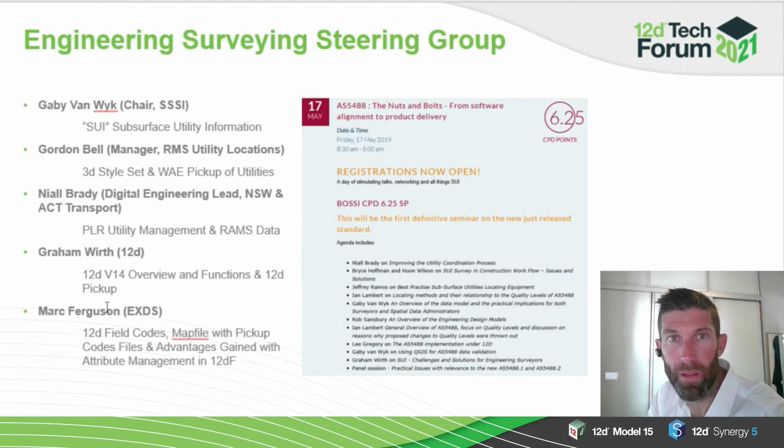Making them consistent with what the Australian Standard sets out, but also making sure that our feature naming conventions are maintained within the RMS guidelines. So we pulled together a lot of the utilities teams within the RMS space - Niall Brady, Gordon Bell, Gaby Van Wyk was the chair with his help through the Surveying and Spatial Sciences Institute. I want to thank them for facilitating our sessions, it was really great. We're looking to kick things off again once COVID blows over, to newer, bigger and better things. Graham Wirth and Marc Ferguson from 12d and EXDS were also involved to ensure we align both entities as to how we're managing all our services.

So the question is why we want to align how we manage utilities - to ensure we provide our teams with a consistent framework for delivery, applying principles from guidelines which will improve critical items of time, cost, safety, and risk across our portfolio.

To do this, we need a collective contribution from across each respective construction team. For reliable information, we need to make sure our teams are aware of the standard guidelines and requirements as to exactly how we manage our utilities - it's the old adage, shit in, shit out. So if we can align our teams as to how we need to manage our utilities, then we can certainly capture some really good, rich data.

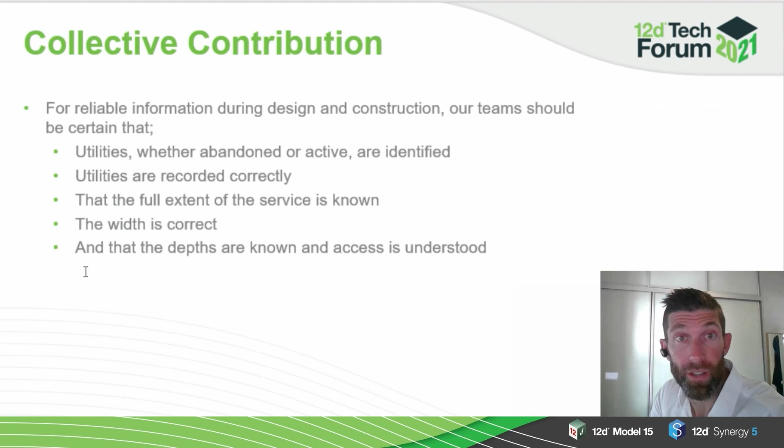Aligning with the Australian Standard, you would have all seen the quality levels. Different departments probably have different categories, different ways they manage it, but we've aligned ours with how the Australian Standard sets forth their guidelines - so Quality Level A through to D, with A being the highest, D being the lowest.

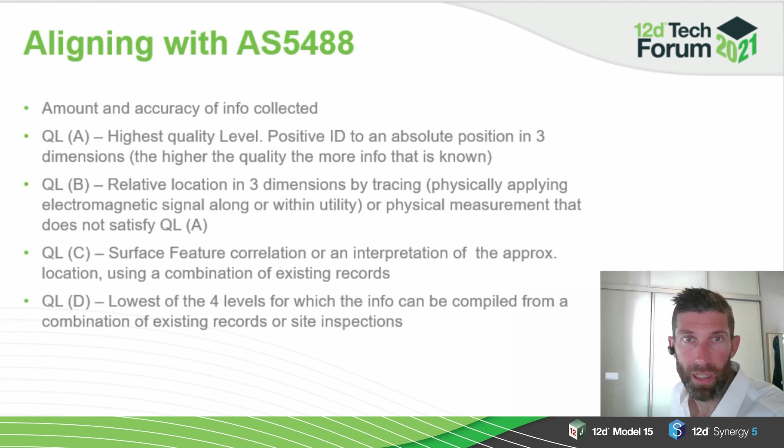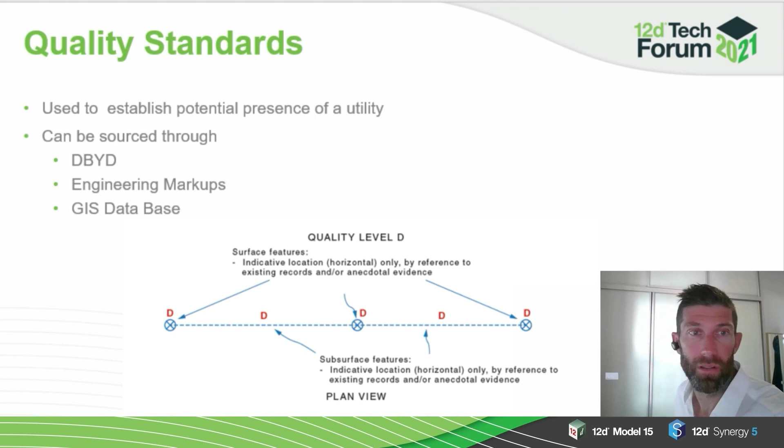Quality Level D is sourced through anecdotal evidence, GIS databases, engineering markups, and dial before you dig. Quality Level C is interpolated information - I'm keeping this quite high level, not going to get too technical - but C is generally interpolated between two potholes or some located Quality Level B data.

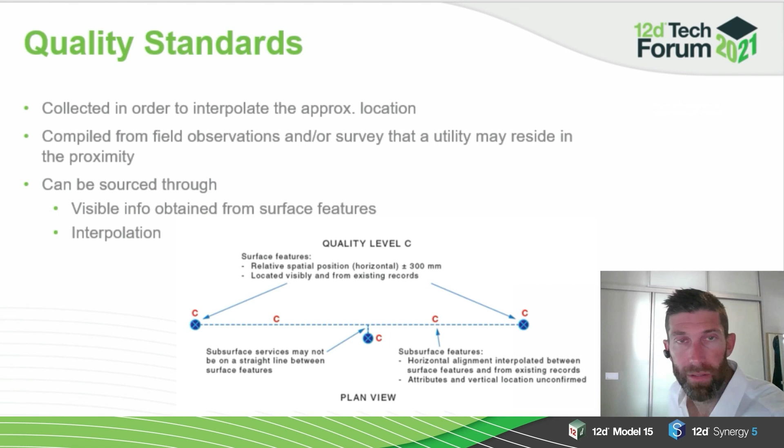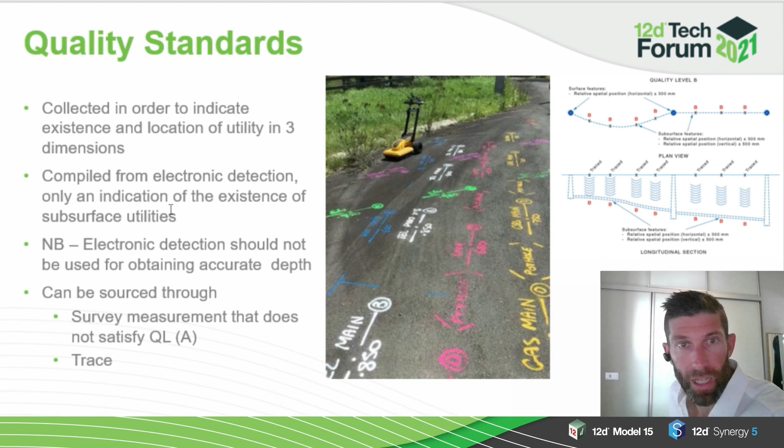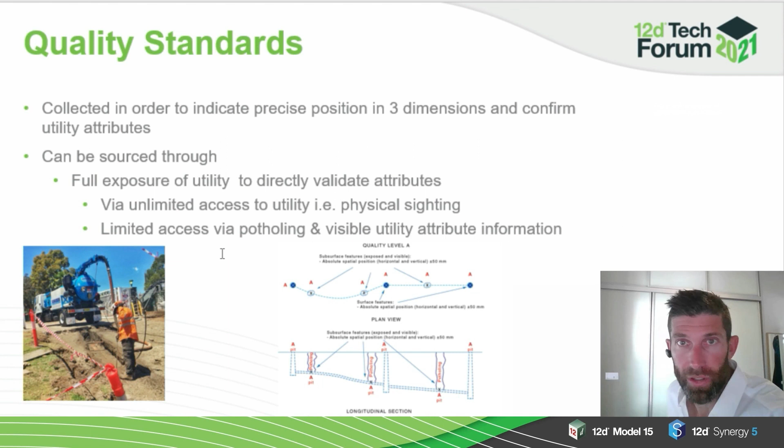Quality Level B is electronic detection, GPR, scanning that doesn't meet the Quality Level A requirements. And then A is obviously positively identifying, so potholing, open trench pickups, and physical sighting of the service - that'll constitute a Quality Level A.

So obviously the quality standards will vary on separate sections of a single string depending on the source of information available. You may only be able to have B in certain sections, potholes in certain locations, C you might use to join two potholes, and outside of that you might have just D - some dial before you dig data that you've digitised.

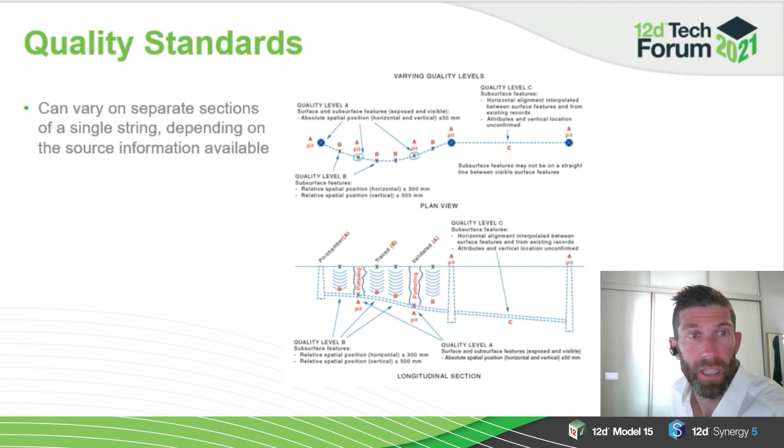So for quality level A, the following information should be captured. Measurements should be taken from the top of the exposed conduit, bank of conduits, the widths, and if there are any existing protective coverings, this needs to be picked up. Protection officers or asset owners might be at hand to help you identify the owners of this data.

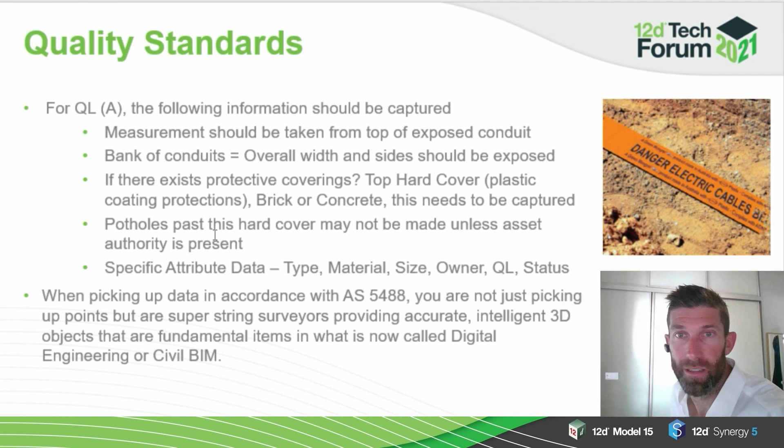You've also got other specific attribute data like type, material, size, owner and status that you need to populate. So we took those requirements and integrated them into uniform coding and utility management strategies within 12D Field. We maintained our coding, the RMS feature naming coding, and populated the attributes through the 12D Field codes function, which enables attributes to be captured at the time of survey. This is also consistent with what G71 is asking for at the moment, so we're satisfying those requirements as well.

Some of this information obviously can't be captured at the point of survey because you may not know it. If you're scanning a surface, you may not necessarily know the material or the owner. So some of these attributes you can make mandatory or optional for that reason.

So as you can see, once we have the 12D Field codes editor set up and ready to go, we're ready to take it out onto site.

Once you get out onto site and go through the 12D Field setup routine, you jump into the 12D Survey Data Reduction panel to set up your 12D pickup function. You give it a function name, define the attribute definition file, which is your 12D Field codes, and you can also define the default model it'll go to, and a map file if you want it mapped as you go. It's all user definable. It's a text file, so you can jump in there and set the panel up yourself through your user libraries, and then create those.

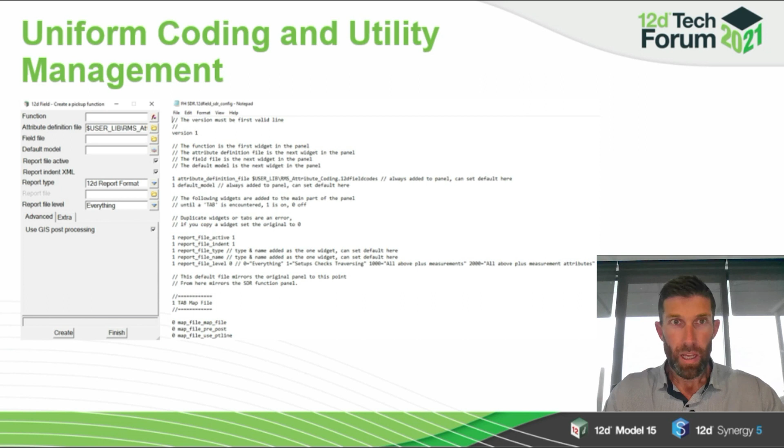You execute that, run it, and it takes you into the 12D Field SDR pickup function, in which you have the ability to commence starting your survey pickups.

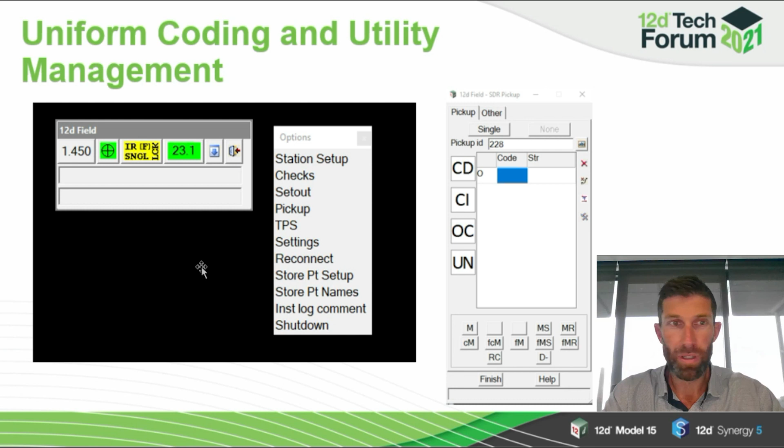You may have seen this demonstration by Graham Worth, but simplistically the CD is your code button. You hit that button, select your code, which is defined under each category and subcategory, and hit MS or MR for measure store, measure record. You select your code first, and then it allows you to store your shots.

It'll prompt you to populate the attributes that you defined through the 12D Field codes editor. As I said, some of these are mandatory, some are optional. Some attributes you cannot pick up out on site.

I won't go into the technicalities, but you may have a scanned service with only the type of service identifiable through that method, such as comms or electrical. That's all you can actually populate at that time, so there's no point making something mandatory if you don't actually have the information to store.

So obviously the best bet is to have as many resources at your disposal as you can, so you can populate this panel with as much information as possible.

As I said, you've got the defaults there, which makes things nice and easy. There are a lot of attributes stipulated by the client or your firm. Try to make as many default as you can to speed things up, because you don't want to be standing there too long trying to pre-populate.

There is an option where you can hit store information from the previous shot. There's a button - when you hit MS, measure store, it'll prompt you for 'last', just down here. It'll then populate the information as picked up on the previous shot, which makes things easy. So if you're picking up a string of shots along one service, it works great - you don't want to be standing there at each shot populating this information. You can just hit last and it'll populate everything that was previously entered.

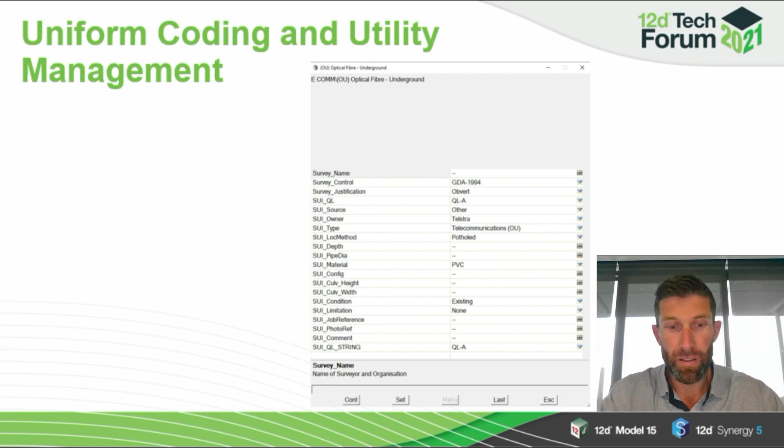The other thing we've been working on is formalising the way we capture rail codes off the back of a lot of rail infrastructure projects kicking off in and around the Sydney area.

You may be familiar with the DSS code library, which is within the Rail Corp and ARTC Sydney spec guidelines. There have been previous map files created in the past for various jobs in Sydney, but nothing has really been done in the 12D Field codes space, so we've been working to consolidate all this information, all these codes, into one 12D Field codes library.

It's a different sort of code list, so you'll have all the string names, 1 through to 100 or so, the internal DSS rail codes, and then the attributes again under each code, which set out exactly which attribute you need to pick up. In this case, it's material, justification, and pipe diameter, which at the moment is what the asset owner is requesting for all service pickups. So this works quite well.

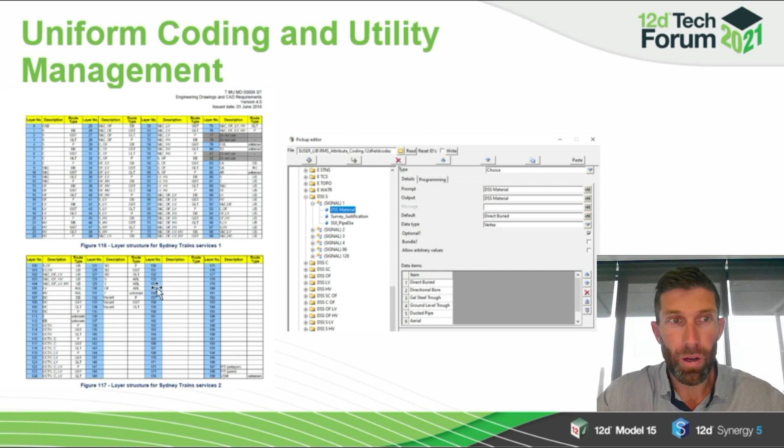It is a different code library. A signal, they're not divided up into signal, well, they're obviously signals and comms, but the service type is then broken down into subcategories. So 1 through to 4, for example, is a signal code. 1 being signal code and a direct buried service. 2 being a signal code and it's direct buried. 3 is signal code, galvanised steel trough. I might have got those around the wrong order, but that's pretty much the theme right through the series of utilities within the DSS.

So got the DSS integrated into the 12D field codes library, and that seems to be working quite well. And then it's got its own map file to go with it as well. So in a similar way that the RMS customization works, this map file also will look for the attributes that have been previously picked up by the surveyor and assign the piping and justification according to what attribute was captured out on site.

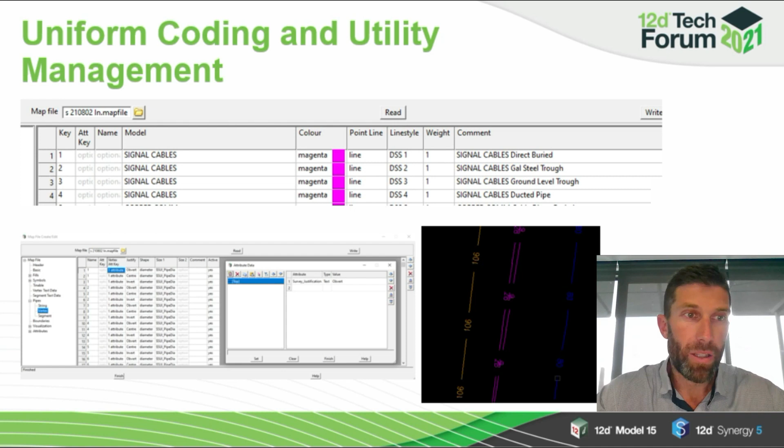The next challenge for us, I guess, going forward is how we present this to our construction teams. And there's many ways that we've been looking at in the past. We've got our typical live service drawings, which are pumped out from the office out to the site teams for their permits and things, which have all the line styles there. But it's pretty limited in that it only shows the line style, whether it's a QLA through to D and a C or an E for comms, electrical, so forth.

But we're really trying to pump this information out to the guys on site with all the metadata attached to it. So there's ways we can do that, and some of the ways we've been doing it, and many firms do it probably a little bit differently, is that we've got to create an attribute manipulator to push all the attributes which are currently sitting on the vertex onto the string. Pretty simple attribute manipulator to create.

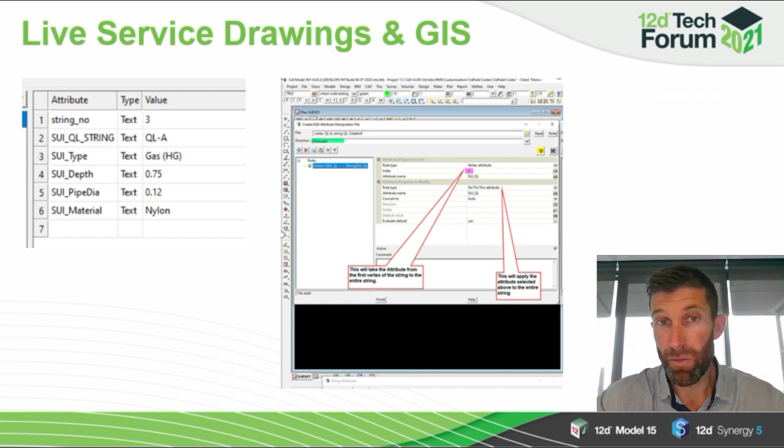There's all different types of versions of them for doing different functions, but this is a good way, or the only way really, to put it out to some sort of GIS platform. So the manipulator takes the attributes from the vertex out onto the string, which then allows you to push it out to whatever GIS database you're using. Something very basic, a KML file. If you write out this data set to Google Earth with the attribute manipulator having already been run over this data, you can click on each string and it'll show you the attributes on the screen.

The other way we're working on at the moment is IFCs, passing through FME, a program that needs to be passed through to get into ArcGIS. So all these attributes are pushed out with the IFC after an attribute manipulator has been run through it. And then, obviously it's a lot more robust platform to use, and you can see the end result there. You can label and symbolize all the data as you see fit and as required by site.

So in a very similar way, we've got live service drawings showing the type of service, whether it's water, comms, electrical, or sewer, and the quality level. We've done the same thing here. It's very simple to manipulate and use. It's very user friendly. It's just getting the right workflow through FME to be able to create that information.

So I guess at the end of the day, really trying to empower and give our guys on site a bit more accountability, not passing the buck, but just really trying to share as much information as we can with our site team so that we can minimise the amount of risk and damage and cost associated with utility management. So we've done a fair bit of work in the utility space in the last couple of years.